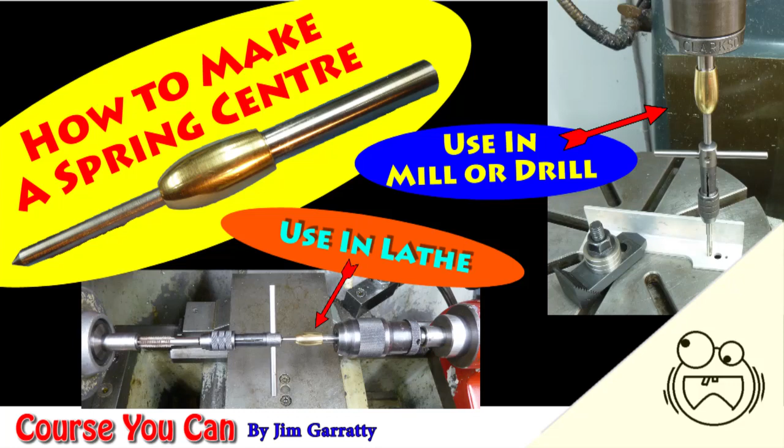Hello everybody, I'm feeling rather pleased with myself today because I've just made one of these.

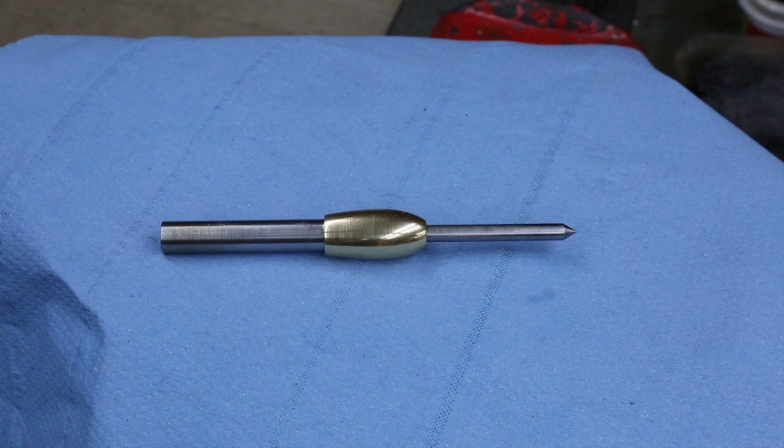This is a spring centre. Some people call it a spring loaded centre, other people call it a tap follower. Now what does it do? It does amazing things. You watch this.

If I hold this end, that piece goes in. If I release, it comes out on its own spring. Isn't that amazing? Oh, what's it for?

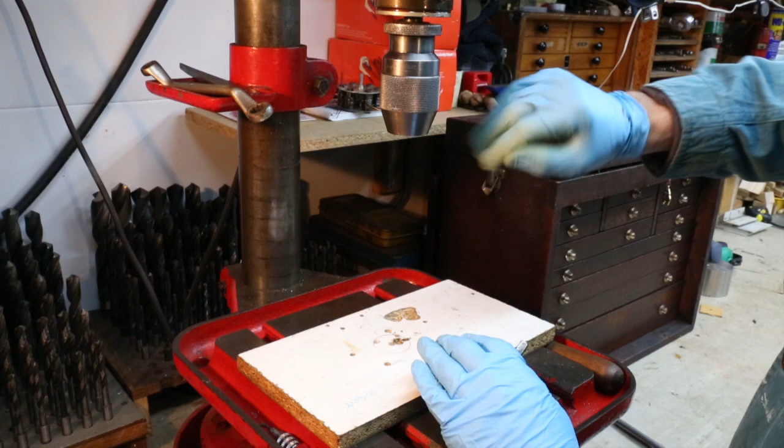Let me show you. Here we are on the bench drill. We've got the chuck of the bench drill here. If I turn the handle, the chuck comes down. Turn the handle the other way, the chuck goes back up.

Now let's assume that this chuck held a drill which has drilled a hole in our job, and that hole we now want to tap. Here's the tap that we're going to use, and this tap has got a divot, a little centre drilled in its top.

Now when we tap the hole, we want this tap to be as vertical as we can get it. If we tap normally, we would put this into a tap wrench, put that into the hole, and start tapping, looking from the front and from the side to make sure it was vertical.

However, if we take our spring-loaded centre and put that in the chuck, the pointy end will now fit into the divot, that centre in the tap. So if we put our tap onto the hole, we then bring down the chuck so the centre goes into the top of that tap, and carry on bringing it down, charging up that spring.

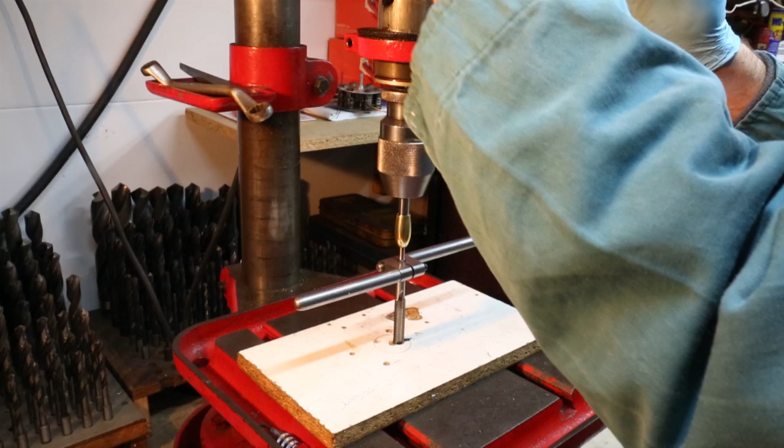Now we lock it down. So the tap is now held perfectly vertical in the hole, and we have two hands to tap the hole. As we start to tap, as soon as this tap digs in, it will start going down.

The support on the top of the tap stays there because the centre is spring loaded, so it will follow it down. And even better, when you come backwards to clear the thread, the tap will rise, the centre will go into the body and enable you to tap nicely right the way down to the bottom of your hole. It's a really useful tool.

I can hear people crying, hang on, hang on. If you get a small tap like this one, it hasn't got a little centre in the top face here. What are you going to do then? You can't put that underneath your spring-loaded centre. Well, all is not lost.

If we loosen this off, take our big tap away, what we do is use this type of tap wrench. With this type of tap wrench, it has its own centre in its top, and we put that in our centre, we charge the spring, lock the chuck down, and now we can tap.

The tap will go down, the support will go down with the tap, come to clear it, the tap will rise because we're unscrewing it from the thread we just cut. The centre will take that into account, and we can carry on tapping nicely with two hands right the way down to the bottom of the thread. Do you see? It's wonderful.

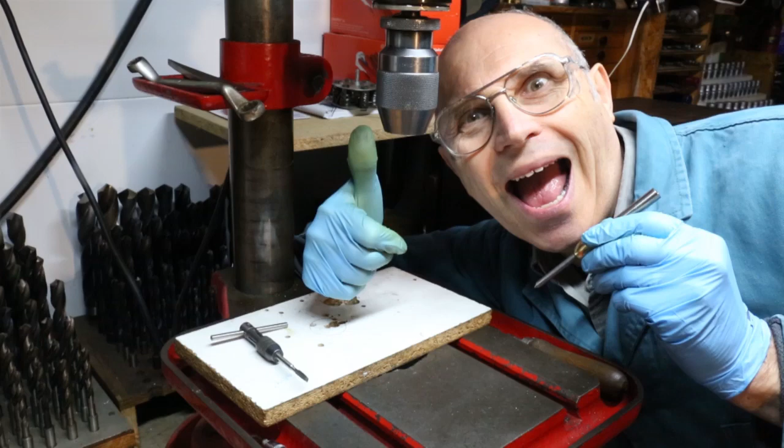And I've made this one, and this video is going to show you how I made it. Now, if everything has gone to plan, a smug looking Jim has just been showing off the spring-loaded centre he's just made. Well, I'm the Jim of several days before that smug one. I haven't got a spring centre, but what I do have is a workshop, some materials, and a few ideas on how I can make a spring-loaded centre. When you design something, the first ideas you come up with are generally not the best.

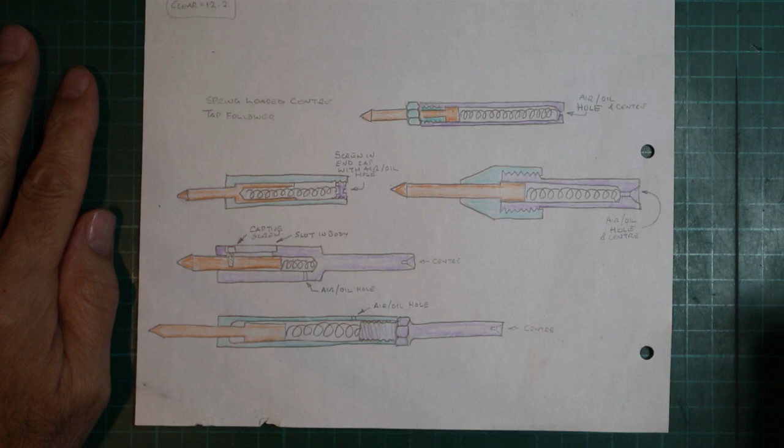Because of this, I like to sketch down at least 5 ideas, ponder them for a while, and then choose what I think is the best one, or choose the best bits from more than one, and then make a new sketch incorporating them. These sketches are the 5 ideas I've come up with. All will work, but I prefer these 2 on this side, and I've decided to make this one.

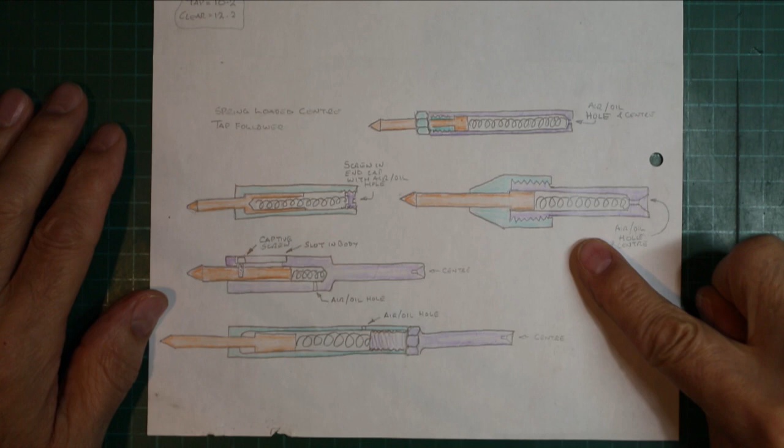So I think a new sketch is in order, and then a search for some materials. And this is that sketch.

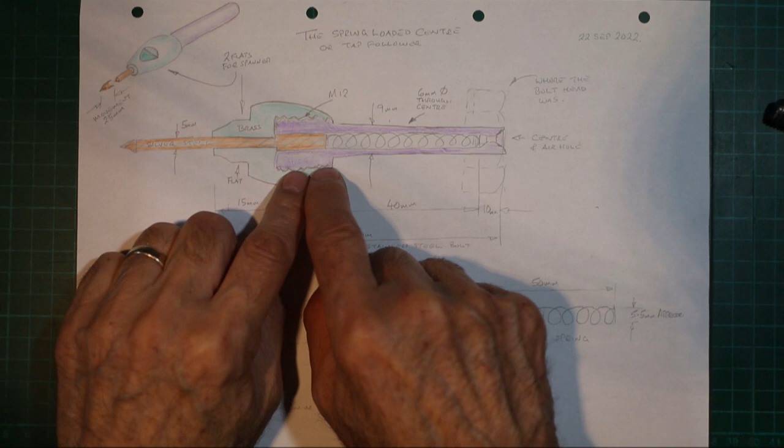Now, the main body of the centre is going to be made out of this stainless steel M12 bolt. Stainless steel, so it's not going to go rusty. I'm going to be turning the head down so it's the same diameter as the shaft, and as you can see I'm going to remove the thread from the shaft except for this piece at the bottom. This end of the shaft is going to have a centre drill drilled into it, and the small hole will be extending into this main chamber.

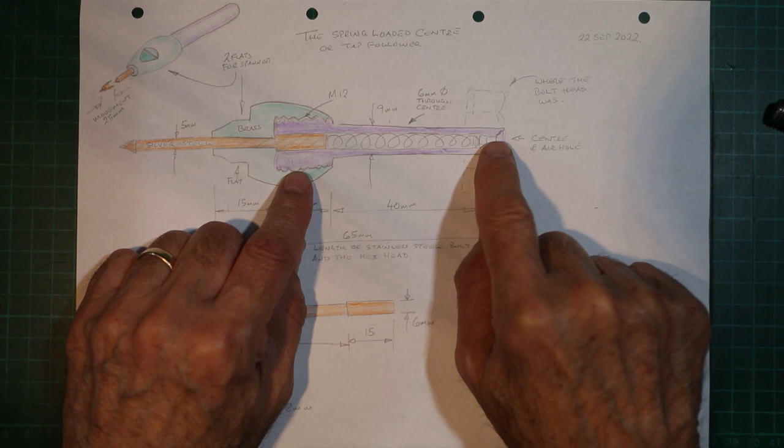Now, as the plunger goes up and down inside the chamber, it's going to need somewhere for the air to go, and that's what that little hole's for, so the air will be able to go in and out there. Also, we'll be able to put oil down through that hole and lubricate the plunger later on.

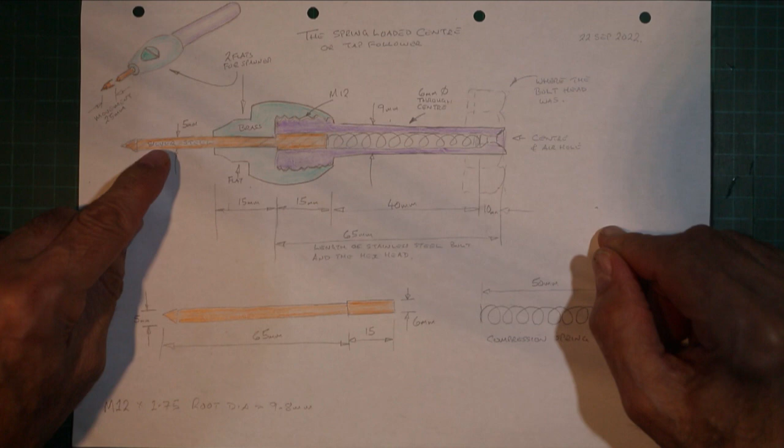The next thing we're going to look at is the plunger itself. That's going to be made from silver steel. I have it here from my silver steel drawer. And the reason I'm going to use silver steel is I can harden the end, which will make the sharp end far more durable than if we just used normal steel.

You can see here, this is the plunger. We'll be turning this down. This end is left slightly large. In fact, it's 6mm as against 5, and that will be used to retain the plunger within this chamber.

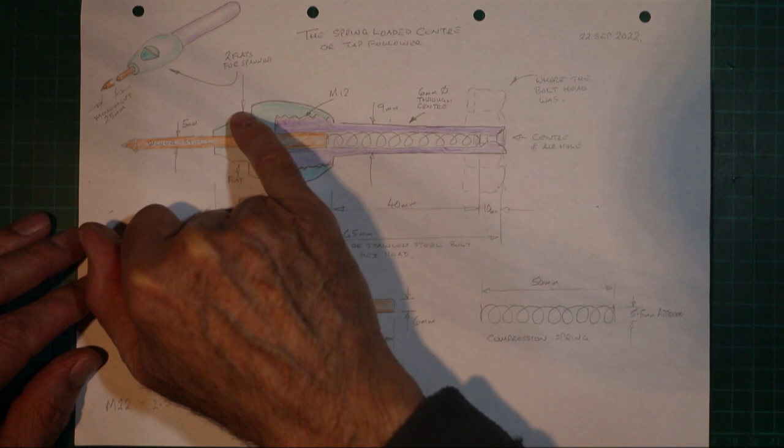This top is going to be made out of brass, and I have the piece of brass it's going to be made from just here. That's going to be screwing onto that M12 thread, so we need to tap an M12 thread into that.

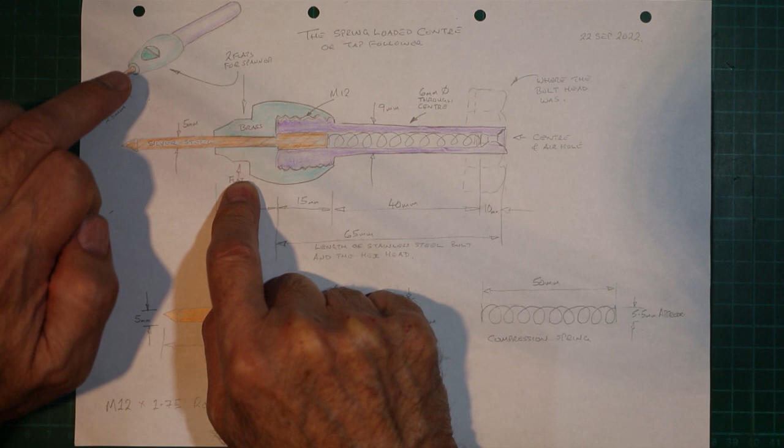And there's 2 cutaways here and here. As you can see on this little sketch, what looks like the window in the cockpit of an aircraft is actually a flat that's machined there for a spanner, and that will enable us to do up this head against the thread that's left on the shaft.

The last thing we need to look at is the spring, and I went through my drawer and I found this spring. It's a little bit short at the moment. I'm just going to stretch that out 5mm, and that will be fine. And that's all the parts of our spring-loaded centre.

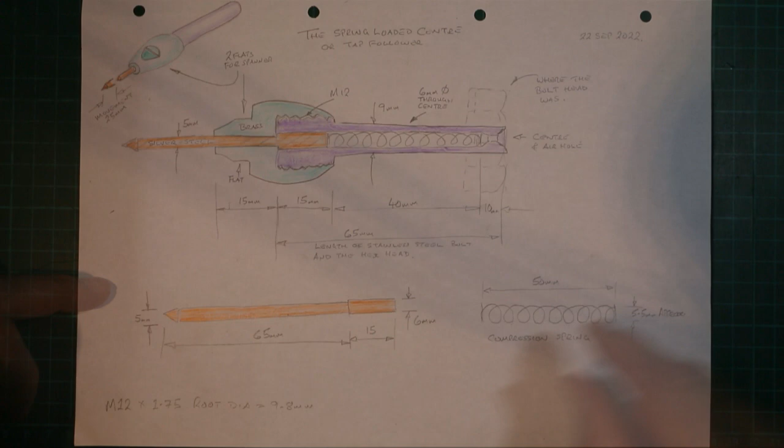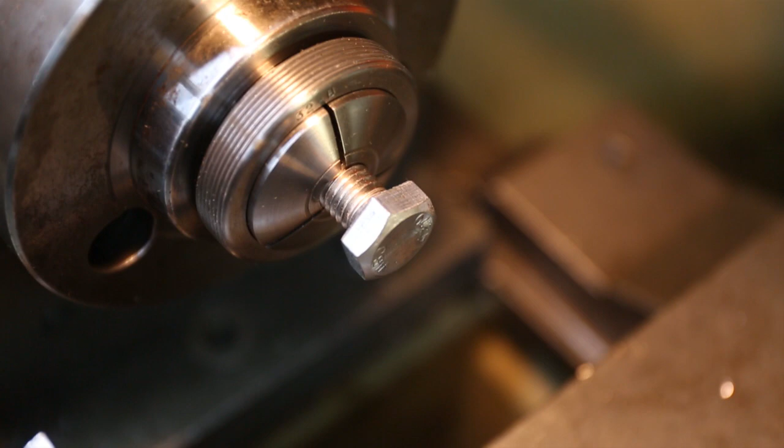The first job we're going to do on the centre is going to start machining the body. This is the M12 stainless steel bolt. It's just going into a 12mm collet, and the first job on this is to centre drill the head. I'll put a centre in the drill chuck there, and we'll turn the lathe on and drill that centre.

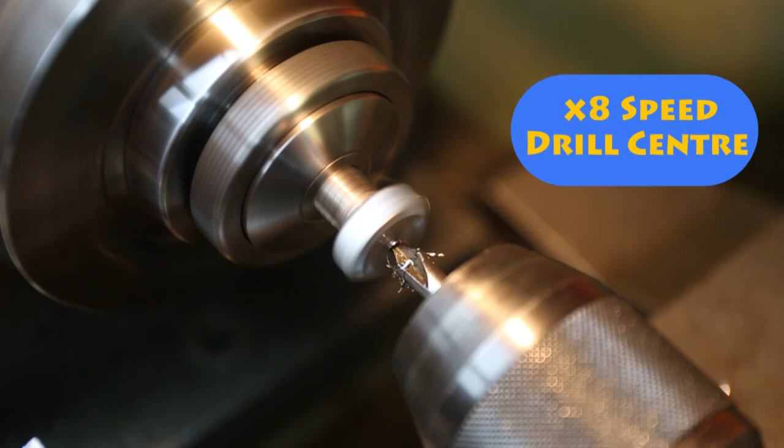We're now going to reduce the diameter of the head, get rid of this hex head and take it down to the diameter of the shaft.

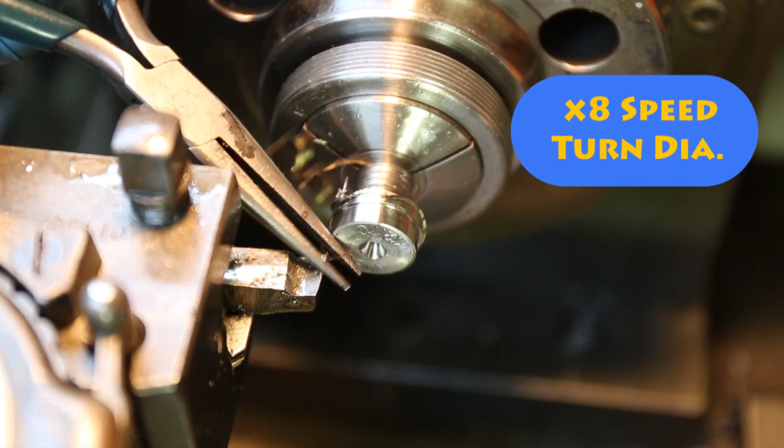We have taken the head right down now to the level of the thread, so it's time to just bring the bolt out of the collet.

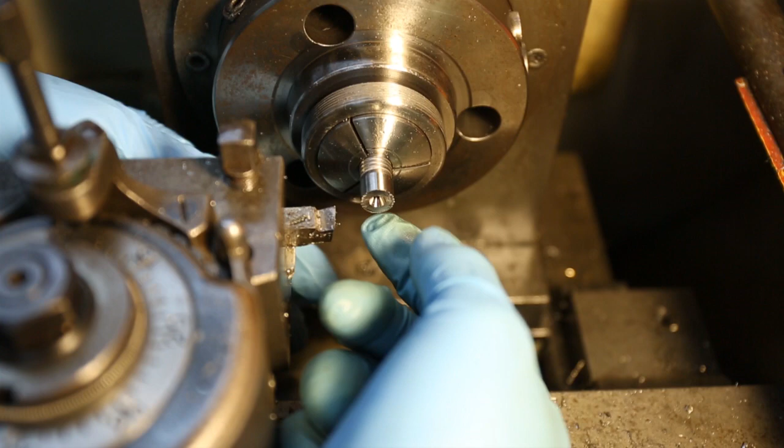I have now wrapped some masking tape around the bolt, 15mm from the end, so I know exactly where the 15mm mark is, and now I can replace the bolt in the collet, and as the tape comes down to the edge of the collet, lock it up and remove the masking tape.

Right, the next thing we want to do is turn this between centres. Now before the centre goes in, I need to put some grease in here, and the grease that I'm using is Castrol LM grease. This is high melting point, high pressure grease, used for wheel bearings. So in this particular instance it's going to be a good grease to use.

Now then, we're bringing the tailstock and the small centre that I'm going to be using. We're going to be cutting down this diameter, so I need the centre to be quite small so we can get the tool in.

A live centre is able to rotate with your job. I don't have a small live centre, so I'll have to use this small solid one to support the job. The grease is to lubricate the centre, which should just touch the job. Do not make a solid centre tight against the job. It will overheat and damage the job and the centre.

Now the drill chuck is in position, the cutting tool can't reach the job anymore.

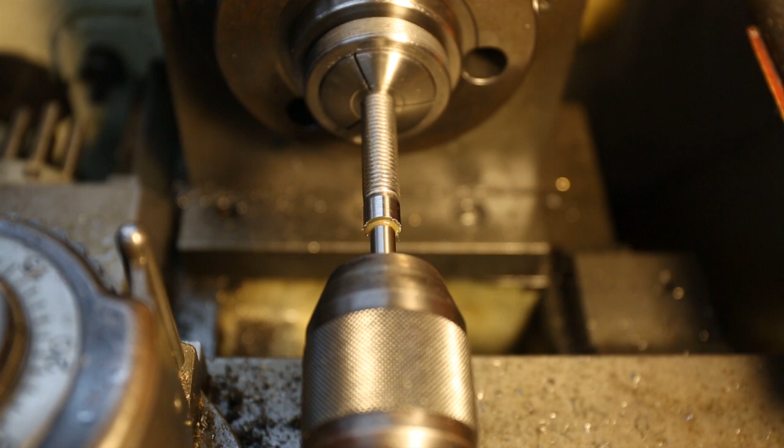I need to change to a different tool. This tip tool will do quite nicely.

Now when you're using a centre like this on the end of your job, it's a good idea to run it for a few seconds, then stop, and put your finger on to see if it's getting warm. What you mustn't do is put a lot of pressure on here, because if you do, you're going to friction weld the centre into the end of your job. So turn it on for a few seconds, turn it off, put your finger on, see if it's getting warm. If it's not, you're okay to continue, but perhaps do it for a few more seconds just to make sure. If it is getting warm, you'll have to readjust the centre. It should be just touching the job, but not tight against it.

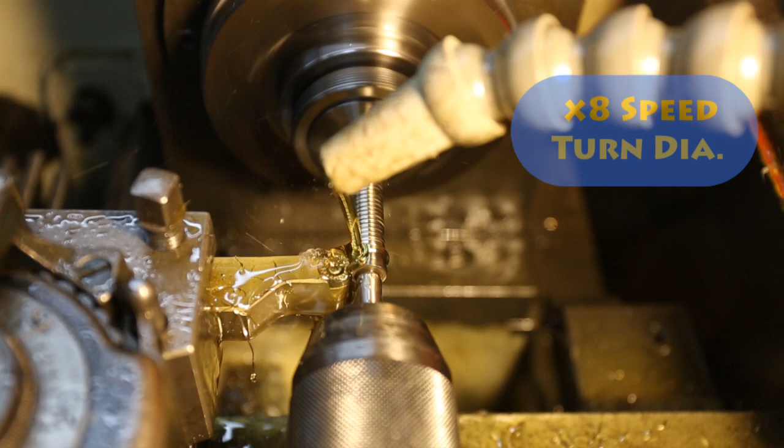So let's turn the lathe on and start doing our first cut. Right, we're taking off the top of the thread quite nicely. I need to clear this swarf out.

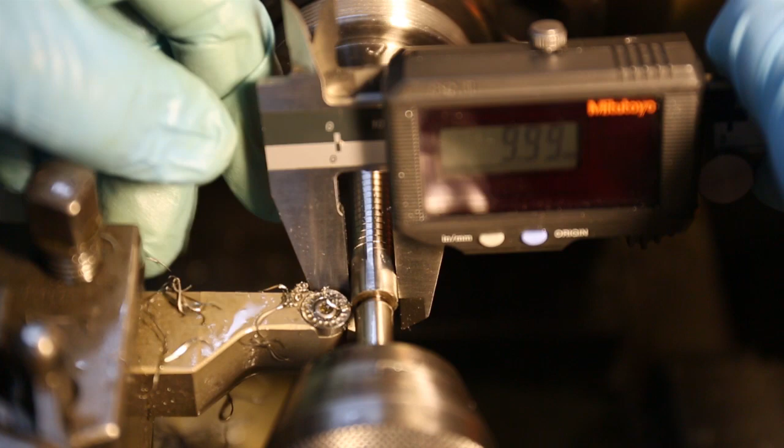We are getting fairly close. We can still see a little witness of the thread right down there in the root. Now this part of the centre we want to keep above 9mm if we can, because there's going to be a hole drilled up the centre which will be holding our spring. So the larger we can make this, the more meat we've got between this surface and the hole inside that'll hold the spring. So I'm hoping to get over 9mm.

Now at the moment we are at 9.8. So I think I'll take off 0.1 and see how much of this thread is left. Well, we've taken that 0.1 of a millimetre off, so we should be down to something like 9.6, 9.59, 9.63, and there's still a little bit of thread, but just on one side of this surface. So I'm going to take off, I think, 0.05, and hopefully that will clean it up altogether.

Right, let's give that a measure. Well, it looks like all of that thread has disappeared now. If I just spin the head round. Yep, that's looking good. Let's just give it a measure. We should be round about 9.5, 9.54. So that is excellent.

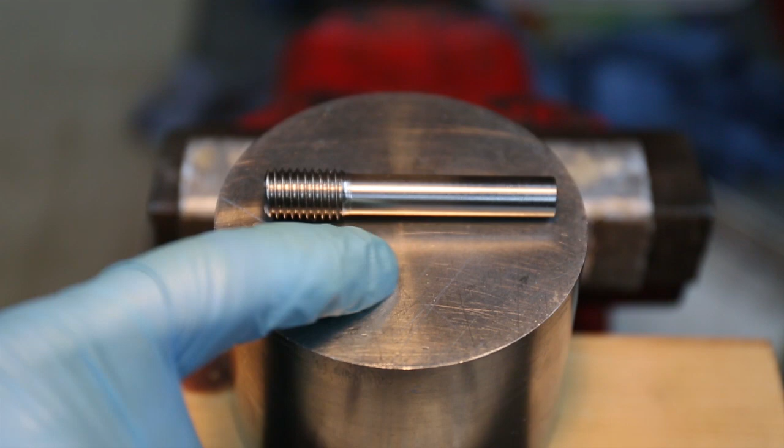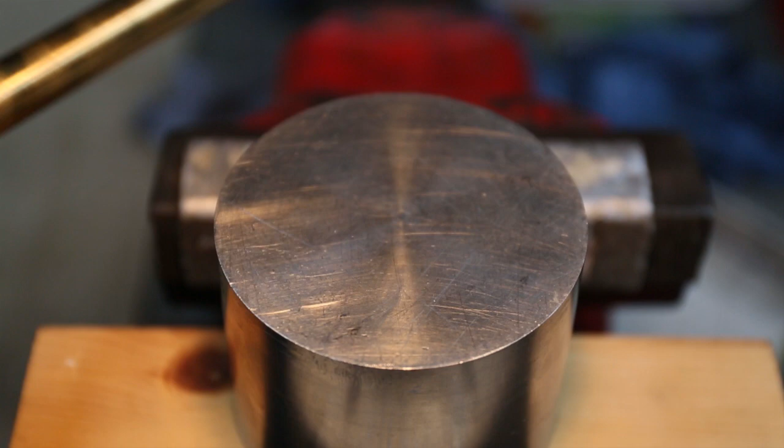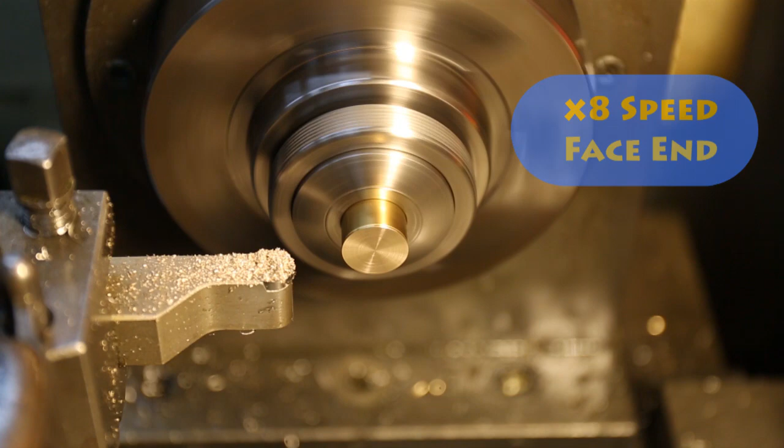We now have our piece of brass in a 16mm collet. First thing we're going to do is face the end off and then drill the centre with a centre drill. And now let's drill the front face with the centre drill. That's all we're going to need, we just needed a centre there to guide the next drill.

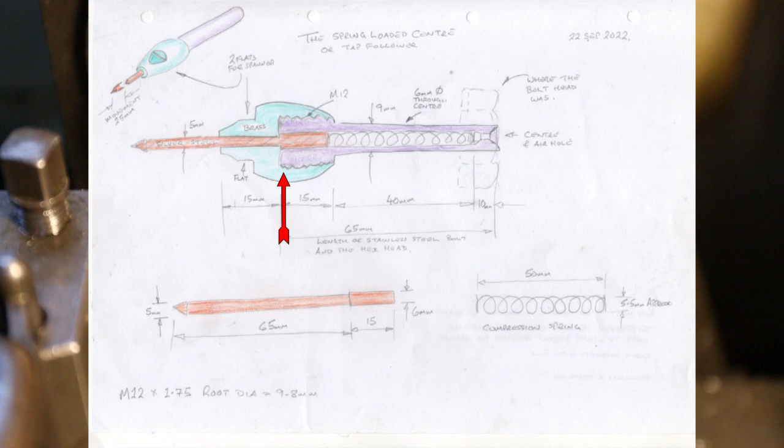So we've got our centre in. I'm going to be going in with a 3mm drill next, and going in full depth. Now we want this thread about 15mm deep. If you look on the drawing, you can see that we're making this piece just here. So we're going to go in with a pilot drill, 15mm, bring that out, then put in a 10.2mm drill, which is a tap drill size for M12, and then we're going to tap the hole. 3mm drill first.

Well, here we are wanting to tap our M12 thread into our job, which is in the collet at this end, and this is the very scenario where we need a spring-loaded centre just here, but of course I haven't got one, so I'm using my little old centre. The M12 tap is the taper tap, that's the first one to go in. We've got our tap wrench. The tap wrench is being supported at this end by the small centre. The small centre's in the chuck, and the chuck is in the tailstock of the lathe.

Because I haven't got a spring-loaded centre, I'm going to have to keep the pressure on the centre here by my other hand up that end, turning the wheel of the tailstock. So we press it, and because this is also quite a coarse thread, I can feel it cutting.

Now I want to come back to clear the thread. Again, if I had a spring-loaded centre here, there wouldn't be a problem - I could just turn it back. But now I want to turn it back to clear the thread. I've had to wind the tailstock back a little, and now I'll clear the thread, go back in, bring the tailstock up again with the centre, and continue tapping. You can see you can get away with not having a spring-loaded centre, but it's so much easier with one.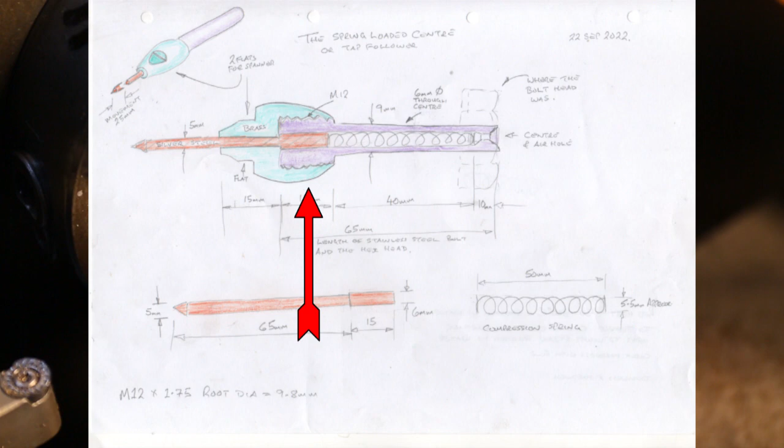Now if we look at the drawing of the front cap of the centre, you see that it's 15 millimeters of thread, and there's another 15 millimeters for the front surface. I think what I'm going to do is, instead of cutting it off 30 millimeters long, I'm going to make it 35 millimeters long, and that gives me a little bit of spare, and I can always cut that off later. Time to part this piece off.

Just like that - we now have the body of the centre back in the lathe. It's held in the collet on the surface that we've just turned. Now if I screw the front piece of the spring-loaded centre back on the body like this, there's a little bit of thread showing in here. What I want to do is face off the stainless steel shaft here, take this surface back until this face of the brass cap is level with the end of the thread. So that's what I'm going to do now.

And now the thread on the body of our new centre lines up with the rear surface of the head.

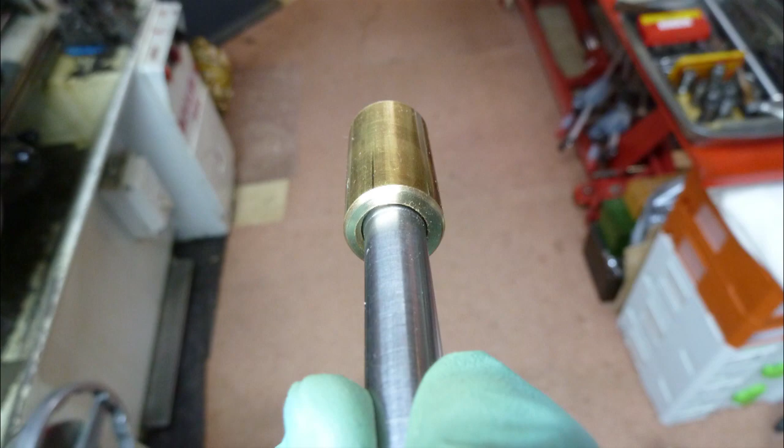We're going to start doing some work on the plunger now. I've put the silver steel into the collet - you can see it sticking out here. Our first operation is just to centre drill the end face of the rod.

We now have a nice centre drilled into the end of the silver steel bar, and this is our setup. The silver steel is now in the collet here, we have the centre drilled at this end, we have a centre in the chuck, and the chuck is in the tailstock of the lathe. I've put grease between the centre and our silver steel. I've run this for a few seconds, about 30 seconds, and this doesn't get warm, so I'm happy that there's no pressure there.

The 70 millimeters we've got here, this is going to flex as I start to cut, so it will get bigger in the middle as the material pushes away. So what I'll do is, once I'm close to the end, I'll go backwards and forwards with the tool, and then just the natural springiness of the material should cut it off, and we should end up with a parallel piece of silver steel 5 millimeters in diameter.

And we're about to start cutting. Our silver steel bar is 6mm in diameter, got to get that down to 5mm. I'm not going to be taking much off at a time. I think I'll try 0.1 of a millimeter just to see how we're cutting, and then I may go up to 0.2 on the next pass.

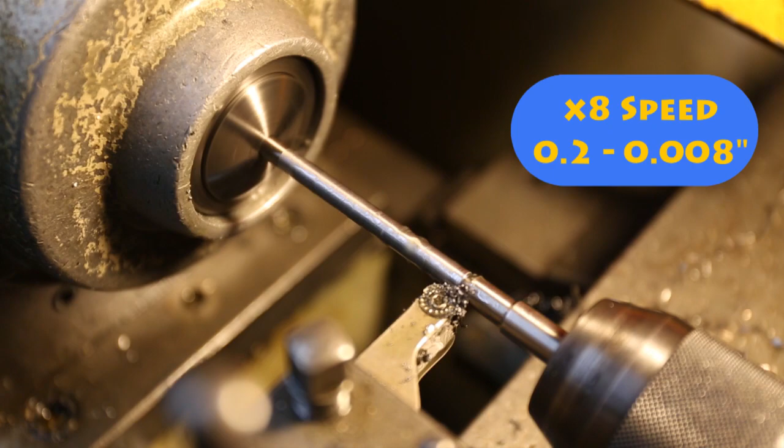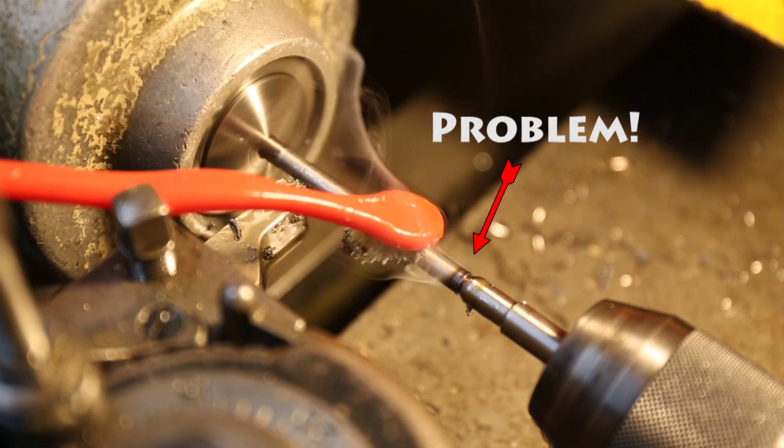Oh gloom, look at that, my centre has overheated the end of the job. I think what's happened is normally I would be using coolant running over the top of the job, which would take the heat away, but because I've got the camera on and I wanted to have a good view, I was putting the coolant on with my toothbrush. Well, it obviously wasn't enough.

I think what's happened is the silver steel's expanded, the slack that I did have in there disappeared, and then it's broken the grease down, and I think it's welded on because it doesn't want to come out at the moment. Well, that's a pain. Well, I was lucky - the centre had started to stick itself to the end of the job, but once I got it out of the vise it just broke away really easily.

There was a couple of pits on the surface of the centre. I rubbed those back with some fine emery cloth and oil, and that's cleaned that up. The end of the silver steel bar, I put the centre drill in there again and cleaned that up. So we are all set for another go.

This time I'm going to be dousing it in cutting fluid, that's what the spout is here, and I'll be checking it at the end of every cut to make sure we haven't taken up the slack. I've also given it a little bit more slack than I would do normally. Right, let's give it a go and see what happens.

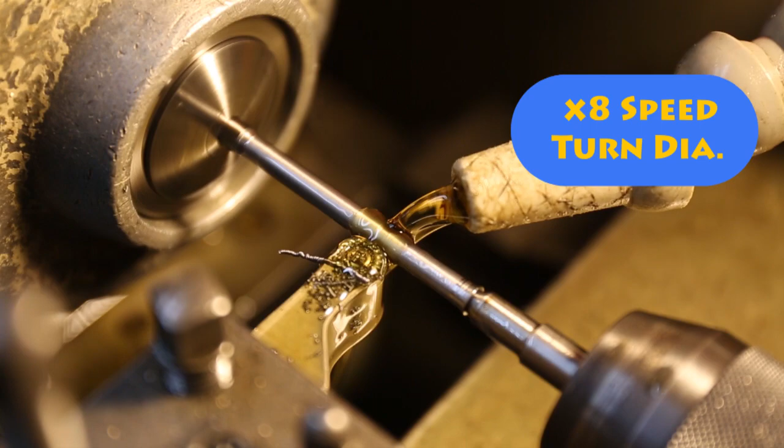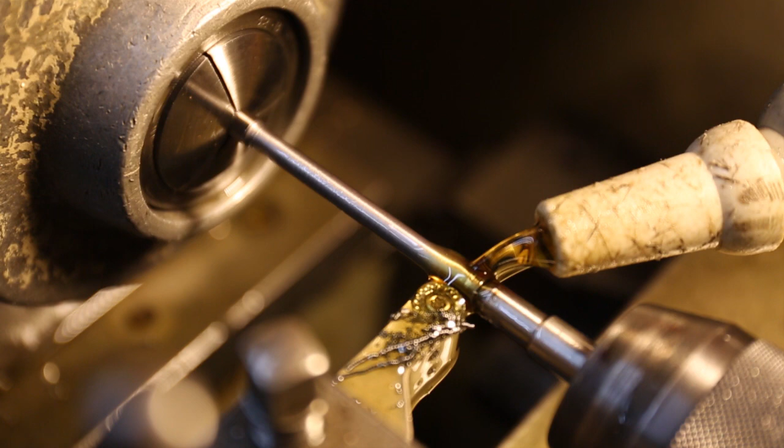Well, it seems to be working now. I've just checked the diameter of the silver steel - it was 5.1mm, which is really good, so I won't be taking any more off of this surface. I do, however, need to square up this end of the cut.

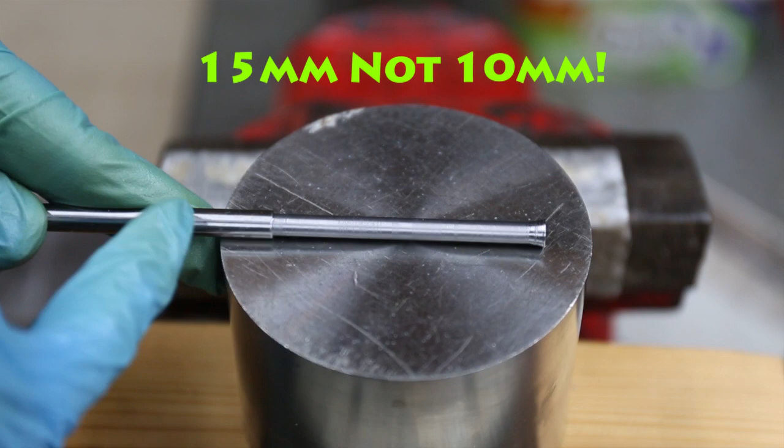And the progress of our plunger - we've now turned this shaft down to 5.16mm. The next job is to cut the bell off the end and also cut our plunger off of the silver steel 15mm up from there, in fact just over 15mm, and then face it back. That's the next thing to do.

I've cut the plunger from the length of silver steel. This piece at the end is actually 15mm long and not 10mm long like I said before. This end face still needs to be faced off in the lathe - I'll be doing that a little later. What I'd like to do now is put the point on at this end, with an included angle of 60 degrees, which I want to turn.

The problem I have is how am I going to hold this in the lathe? If I hold it on this face here in the collet, then I've got all that sticking out and it's liable to bend when I try and machine this end. However, if you look at the collet, which is here, this is a 5mm collet, so I can clamp on the thinner part of the plunger. The clamping face on the collet only comes down 20 or 25mm.

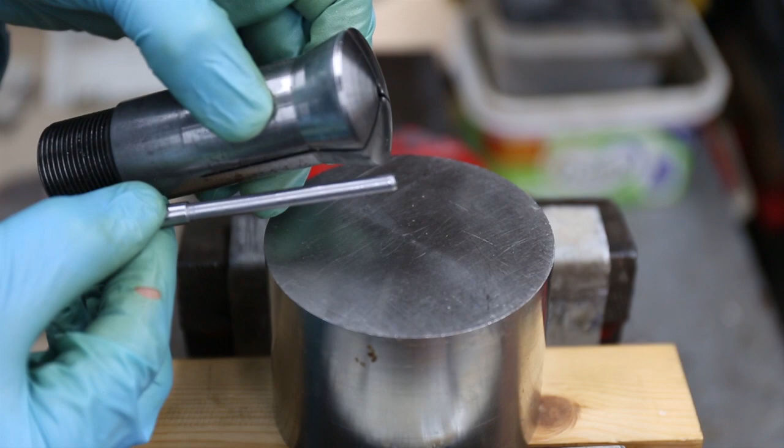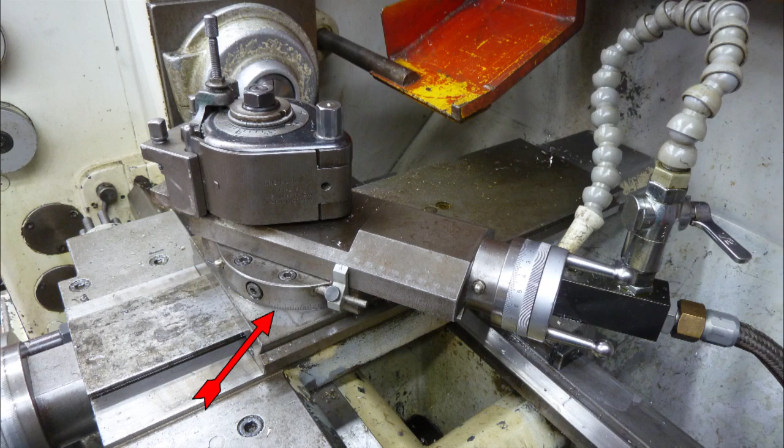So what that means is I should be able to load the plunger in from the rear of the collet and have it sticking out the front, and then I can put it into the lathe. Let's see if that works. Well, that's looking promising - our plunger is held nice and secure in the collet just here. I've set the compound slide to 30 degrees, and now all we have to do is turn the lathe on and start to machine our point.

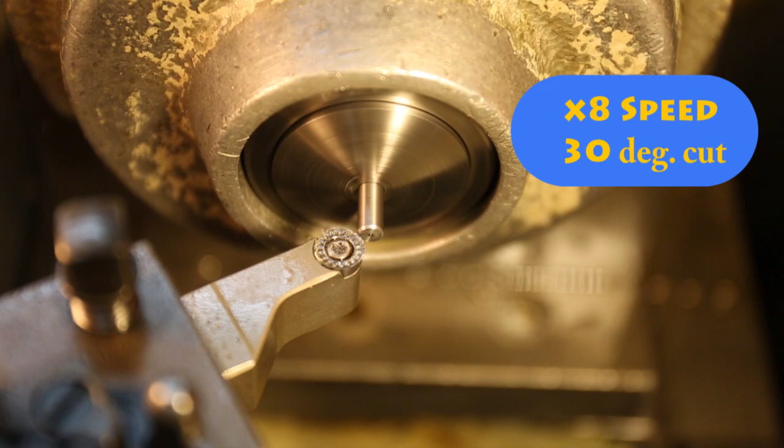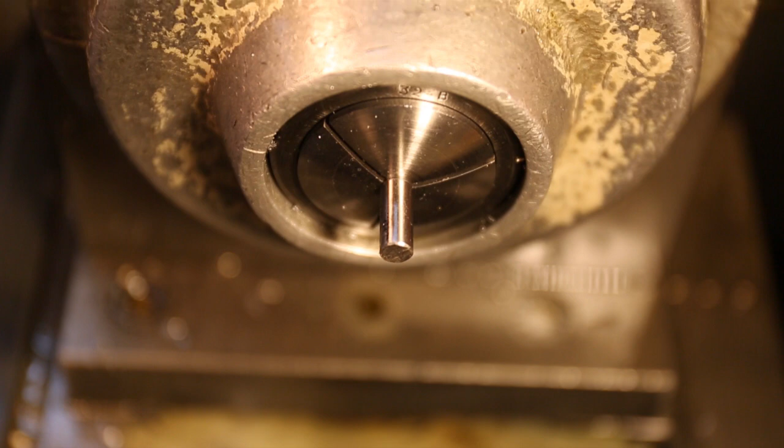I've removed the plunger through the rear of the collet, reinstalled the collet in the lathe, and then inserted the plunger, pointy end first, back into the collet. We can now machine its rear face. I just need to face this end now.

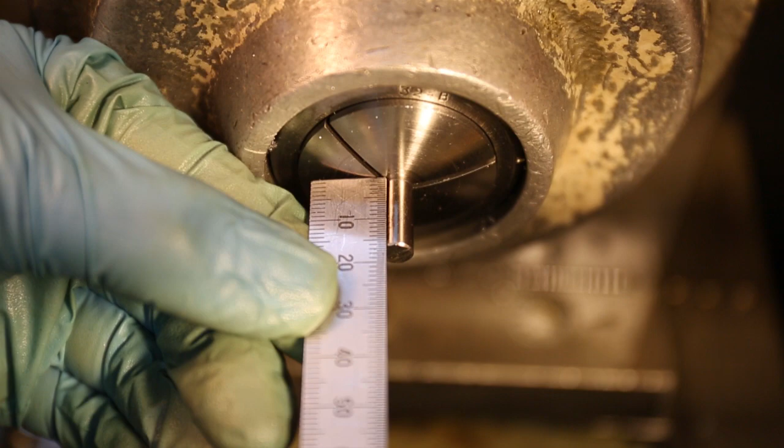I want this part of the plunger being 15mm long. I'm going to be measuring it with a rule because it doesn't have to be that accurate, and I've got about 1mm to take off. Only one place left now to turn on the plunger, and that's this diameter here. At the moment it's 6.6mm and it's got to be cut down to 6mm.

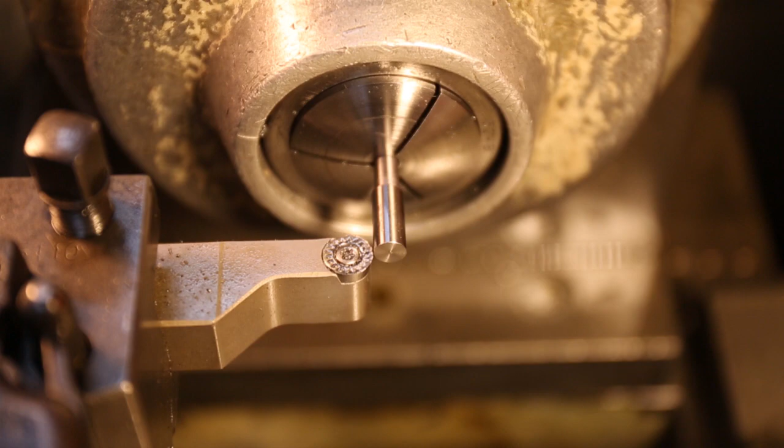The plunger is now complete. We have this diameter at 5.1mm, we have this diameter at 6.1mm. We also have the point at the tip, which has got an included angle of 60 degrees.

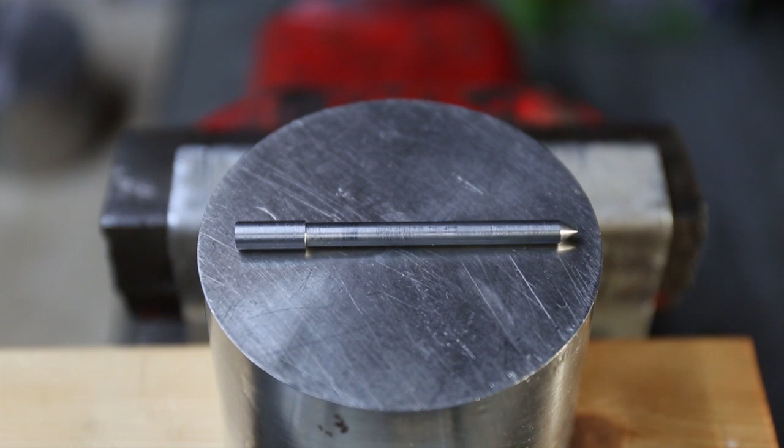We are back to work on the body and the head of our centre. Now, do you remember I said that I didn't want to drill the hole up through the centre of the body? Well, the reason is because now I want to machine the head in place on the body. So this is now screwed onto that M12 thread. Now what I suspect is going to happen is this will not run true to the centre of the body.

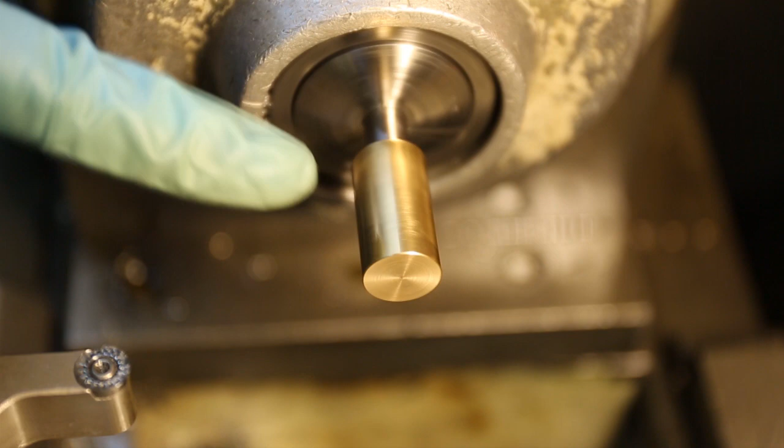So what I want to do is put this in the collet, turn this down on the outside and also face it off to make it all nice and square to each other. And as suspected, there is a little bit of run out between the body of the centre and the brass head. So I'm just going to turn down these two faces and get them all nice and square.

The end face and the side of the head are now nicely turned down and all in centre with the shaft. The next thing to do is to centre drill this end face.

I now want to drill a hole in the front of the head for the plunger, which will fit through there. We know the plunger is 5.1mm in diameter, so I'm going to go through with a 4.7 first, since you drill slightly oversized, and then slowly work my way up in tenths until the plunger slides nicely into that hole.

The 4.7mm hole is too small, and the plunger doesn't fit into the 5mm hole either. Oh no, I just went to my 5.1mm drill bag and it's empty, so I haven't got a 5.1 drill. No, we're getting very close. I do however have a 13/64 imperial drill, and that's 5.159mm. That's close enough, I'm going to try that.

So the drill going in now is a 13/64, 5.159mm. And the plunger goes into the 5.159 drill hole. The 13/64 drill is the right size - there's hardly any clearance there, which is good.

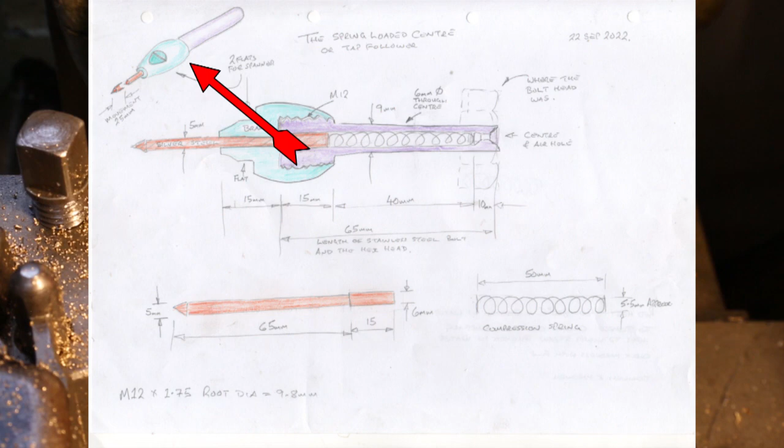Now we've drilled this hole in the front of the head for the plunger, and a very nice fit it is too. The next thing I want to do is actually shape the head. On the drawing you can see up here in the corner I've got like an egg shape, so that's what I want to do on here. The way I'm going to achieve that is by using the compound slide at different angles and then join up the angles with a file to end up with that nice egg shape. At least that's what I'm hoping.

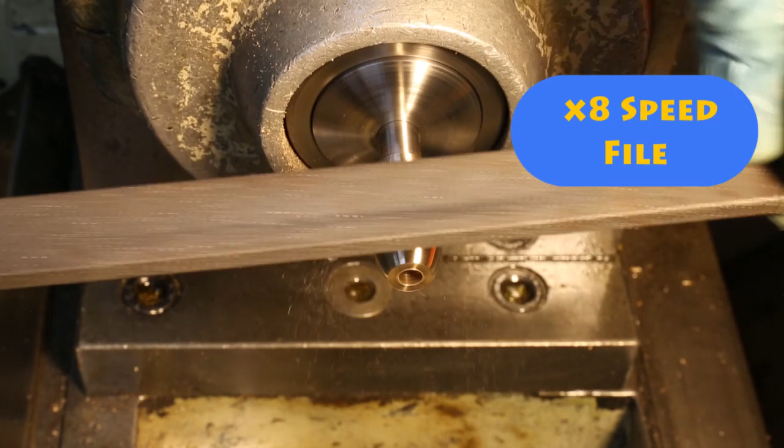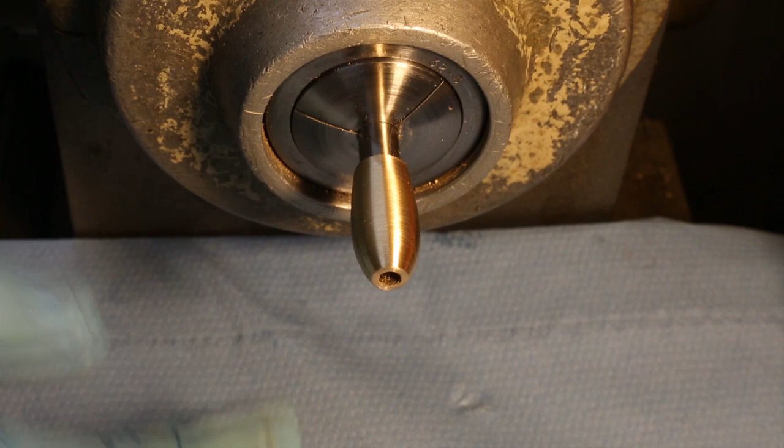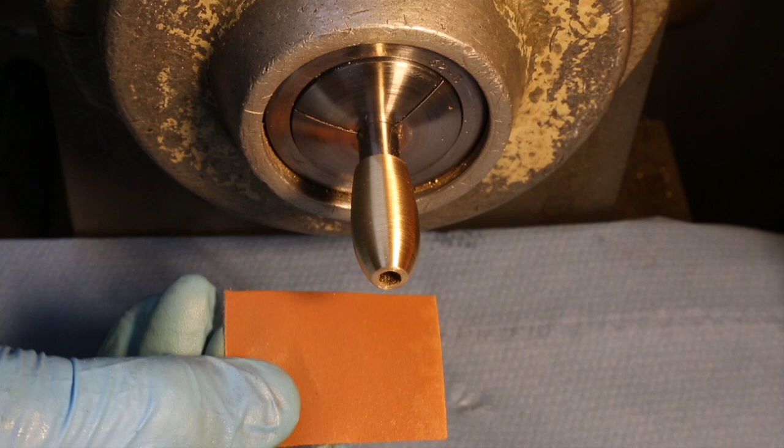A couple of minutes ago it dawned on me that I haven't covered up my bed. It's really important if you're using abrasive materials at the headstock of your lathe - the particles of abrasive material will fall on the bed. If you then move the carriage up and down, they can get between the carriage and the bed. If they get embedded into one or the other, it's going to cause a lot of wear. So if you're going to use abrasive materials close to the headstock, or anywhere really, make sure the bed is covered up.

I've washed my bed down now with oil, making sure that it's all clean, which it is. So I'm going to carry on with this cover over the bed.

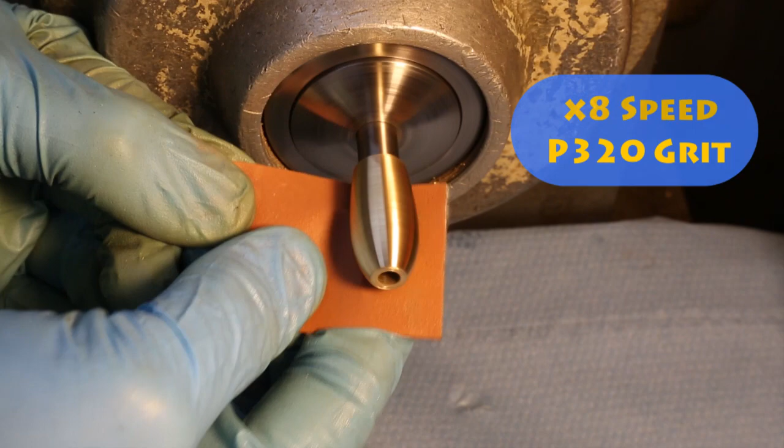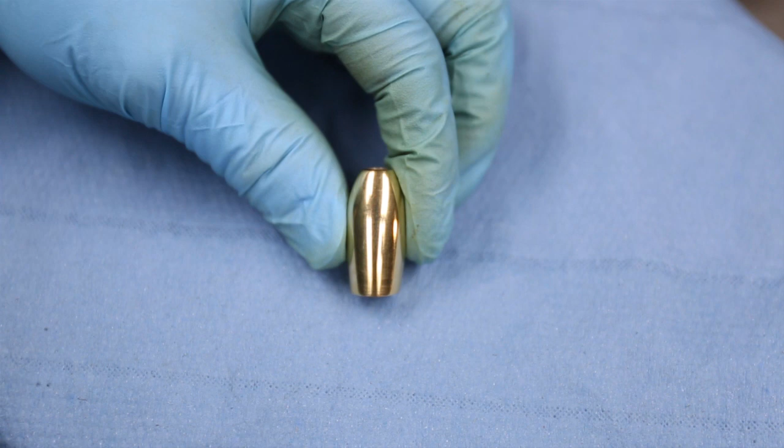I've taken the head off the body so we can have a closer look at it. It's all nice and polished and it's all nice and finished. So we can put this to one side now and get back to the body of the centre.

I now have the body of the centre in the collet, and in this chuck here I've got a centre drill. The next job is to centre drill the forward face of the centre. Once that's drilled, I'll then take the centre drill out of the chuck, replace it with a 6mm drill, and use that to drill the chamber inside the body of the centre. That chamber's for the spring which will push the plunger down all the time.

Now that hole has got to be 55mm deep from this face. Mustn't go much further than that because it's liable to pop out the top of the centre, and that won't be very good at all. So, 6mm drill, and it's got to go 55mm deep.

The 6mm hole has now been drilled. Let's see if the rear of the plunger fits in. Oh yes it does, look at that.

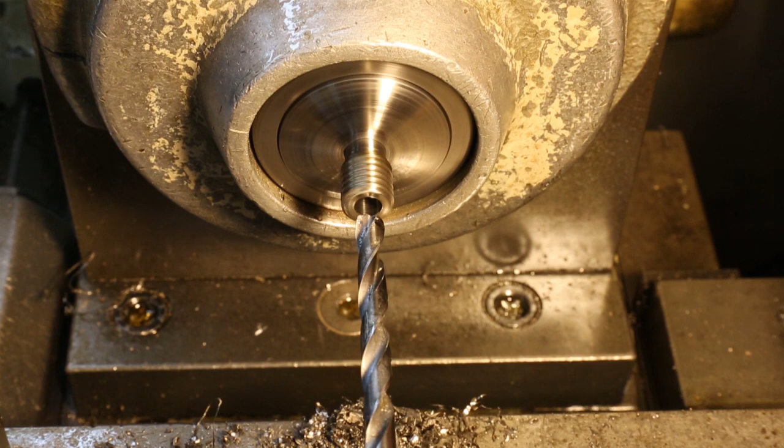That's good - I want a little bit of slack in this hole, so I've now put a 6.2 drill in the chuck, and we'll drill all the way to the end, 6.2, and hopefully that will give us enough clearance for the plunger to move nicely.

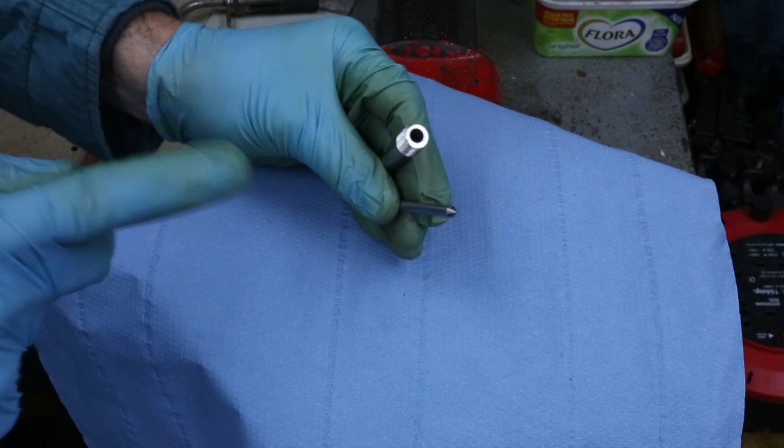At 6mm in diameter, the hole up the centre of the body was just a little bit too tight and the plunger wasn't travelling up and down nicely. So I've now opened it up to 6.2mm, and now it's a lot freer, and I think that's going to be fine. The only thing we have to worry about is if we make the slack too much, the spring could get trapped between the inside of the body and the outside of the plunger. But I think that is going to be fine.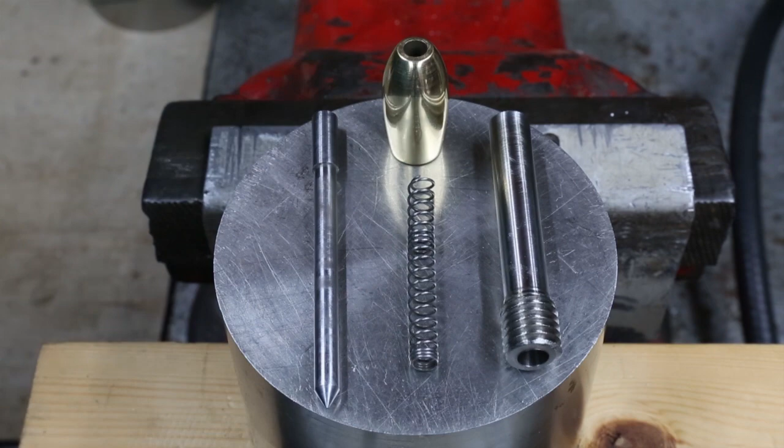These are now all the parts that make up our spring-loaded centre. Next job is to do a little bit of heat treatment on the plunger.

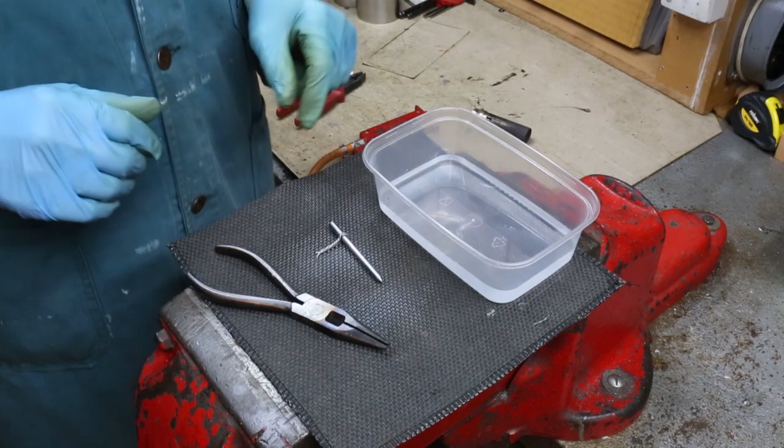I'm all set up now for doing a little bit of heat treating. This is the plunger, it's made from silver steel, and I want to harden the end, the pointy end here. So what I'm going to be doing is hardening it with a flame. It's going to be heated up to red heat and then dumped into the water to quench it. Now, when you're heating things up like this and you're going to hold it with your pliers, the heat that gets into the pliers will mess up the temper of the jaws and make them go soft.

This is a pair of pliers which I keep to one side, and these are my heating pliers. You can see by the tempering colours on there. So these are the pliers that I use when I'm heating things up and I have to hold them.

Shiny round things, when you're holding them in the pliers, have got a habit of spitting out. So what I tend to do is put a piece of wire around, and that gives me something to hold. Still got to be careful, because as you heat this up the wire becomes loose and your bit's liable to fall out, so you've got to keep your wits about you.

So the idea is we will turn the blow lamp on, heat this end to red heat, dump it into the water to quench, and that should harden it. I have the lighting subdued, I have the blow lamp on, and we're about to heat the plunger.

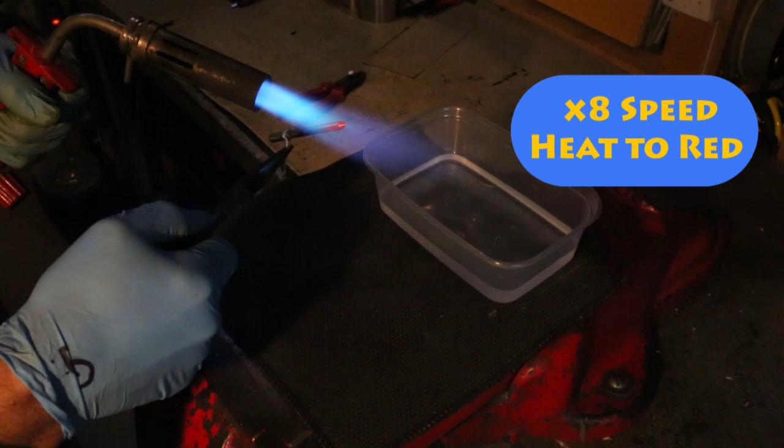That is the hardening process complete. Just let that dry off.

One of the ways of checking the hardness of materials, a quick and easy way, is to use a file on the material. The thing is, if you've got a very hard material like this is at the end, if you file it, it's going to blunt your file. So might I suggest that if you do this, use the very top part of the file, the part that you don't use very often.

Now, with the plunger, we haven't heated this end, and if I use the top end of the file, it's taken the edge off here, so I know that the end is nice and soft. If I do the same thing again with this end of the file, and then I'm going to go on this lip just here, well, it's taken the black oxidizing off, but it hasn't scratched the metal at all, and that's really hard.

In fact, it's so hard that if we had this assembled as the centre and I dropped it on something hard, the end could actually chip off.

So what we're going to do now is anneal this slightly, and we're going to bring down the temper. We're going to warm this up to a straw, but of course we can't see many tempering colours at the moment, so we're going to have to clean it up. I'll put it in the drill, run over this with a bit of abrasive paper, clean it up so it's nice and shiny, and then we're going to warm it up to a straw colour and then quench it, and that will temper it. It will still be hard, but it shouldn't be that brittle.

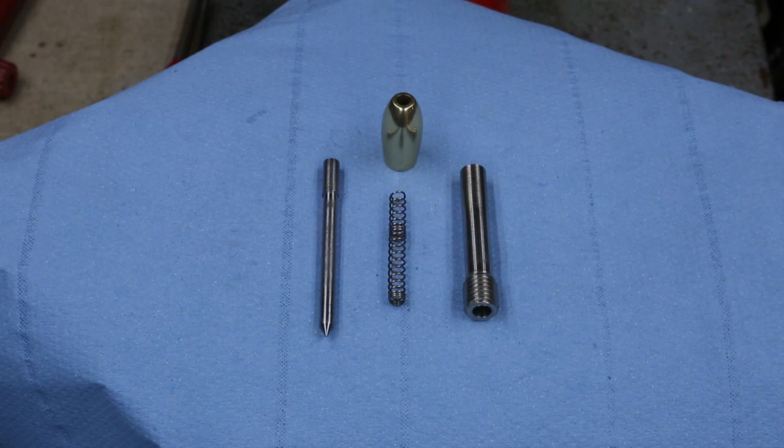These are all the parts that make up the spring-loaded centre. Now there's one job I haven't done, and I'm not going to do it, and that was to put two flats on this end of the head so we could get a spanner on to tighten it up onto the body. It doesn't need that. I've actually put it together already and it goes together nicely, finger tight. So let's put this together.

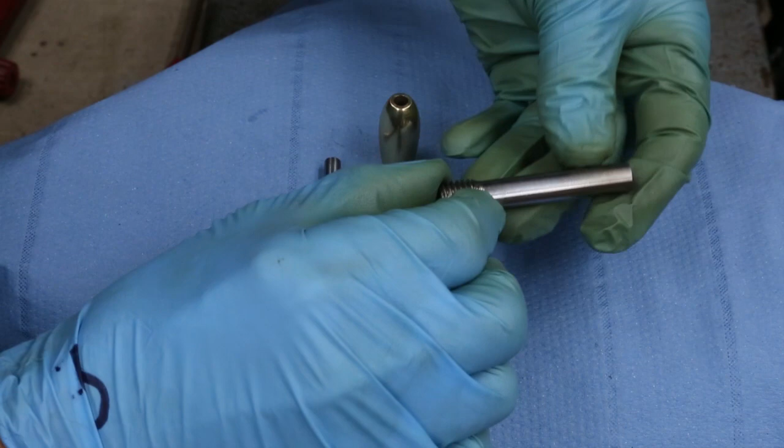We have the body, we have the spring which goes up the centre of the body, the plunger now fits into the body, and the head slides over the plunger, and we can screw the body into the head. Just like that. Now, does it work?

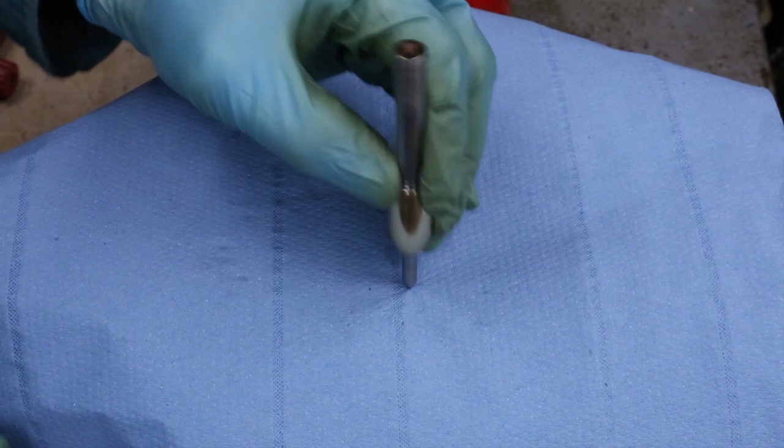Look at that. My first ever spring-loaded centre. Ta-da! And at last I have my very own spring-loaded centre.